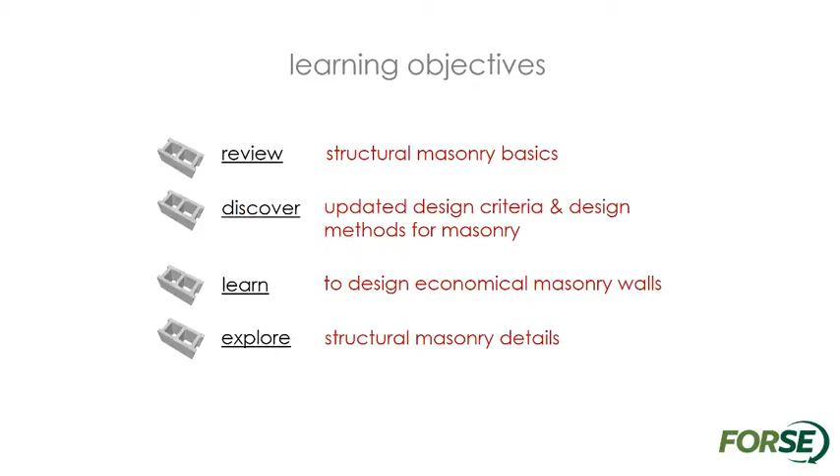So there's a huge misconception in the field of building and construction today that masonry is not a good building material. At least that's what I see on a day-to-day basis. People say it's too expensive, it's too old, there aren't any new techniques to be used, it's not attractive. And I'm here to challenge all of those beliefs because masonry is completely flexible, it's very cutting edge, and we need to give it some more credit than we currently are. So a little bit about me before I get started.

I'm a structural engineer, and I'm licensed in California and in Arkansas, which is where I currently live now. I came up today from Jonesboro. I got my undergrad at Notre Dame, and then I moved out west and got my master's at Stanford. And that's where I started my career. And so for those first 10 years of working, I was a consultant in Southern California.

And then I joined Bentley Software. I don't know if you're familiar with Bentley. They do a lot of engineering software, but they also have MicroStation, which is their big drafting product. And then I joined FORSE in 2016, where I've been ever since.

And FORSE Consulting is a team of engineers. We all come from a variety of backgrounds, and we all have a pretty diverse experience in design. We've all worked extensively with masonry. We're a consultant to the International Masonry Institute and have been since 2010. And like I said, a lot of us have specialized in masonry design in our careers. So the fact that I started my career in California will lend a little perspective to this presentation for you.

When I started designing, we were working on every project under the sun. We had military barracks, we had park structures, restrooms, comfort stations, pavilions, that type of thing. Schools with gymnasiums, hospitals with outlying buildings. And because I was a new engineer and I didn't know any better, I just used what everyone else did there, and that was masonry. So we did a lot of masonry design with steel framing or wood framing.

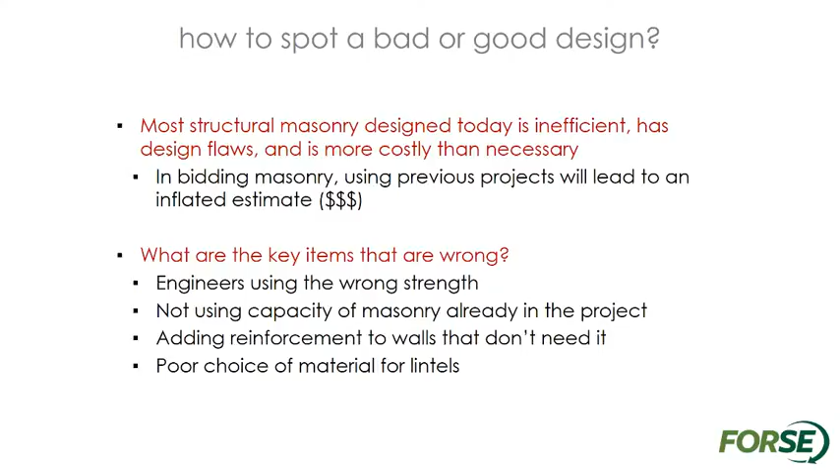And the key items that are wrong are engineers are using the wrong block strength. That is a huge one, and we'll jump into that one pretty quickly. We're not using masonry that's already present in the structure. It may be ignored and then built around. And that masonry is usually there in some form or another with stair towers or shafts. When it is there and it's not used, we're over-reinforcing it. A lot of partition walls don't need reinforcement. We'll talk about that later too. And then investing in your choice of material for lintels can be pretty expensive if you're trying to force a material into masonry that doesn't necessarily need to be there.

So if we move away from the bad design to the good design, we'll move away from lower f'm, which is the block strength, to higher values. I'm not really going to go into control joints too much today, but that also has a huge effect on the cost of your construction. You would move away from putting them in openings and into the field of the masonry. Steel lintels should be replaced with masonry lintels. Instead of reinforcing all of your partition walls, only do those that need it.

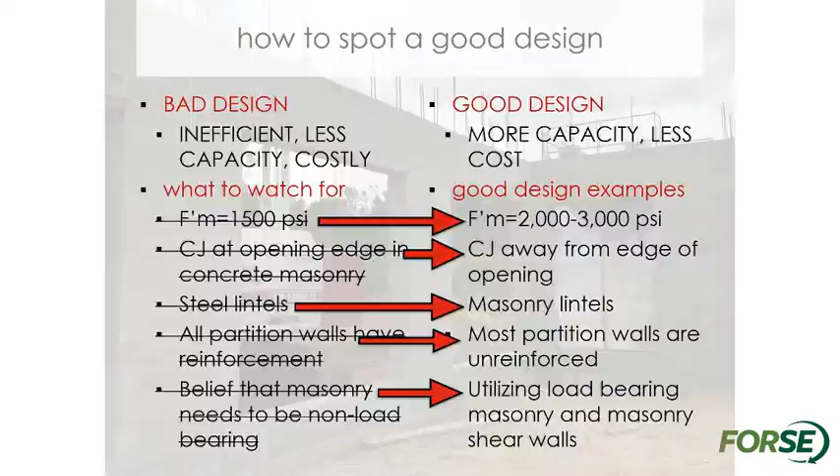And then change our mindset, the belief that masonry needs to be non-load bearing. A lot of people think, oh, the wall is there and I just need to design around it. But if it's there, we need to utilize the strength that it brings to the project. So here's the order in which we'll address our topics today.

Can everyone hear me okay? Okay, I think there's a mic on it here, but I tend to be a little bit softer spoken and then I go quickly and I don't want to lose anyone.

So we'll start off with some structural masonry basics, move into some of the masonry systems that are out there, talk about stair towers and shaft walls, interior partitions, masonry and steel interfaces, and then finish it up with lintels.

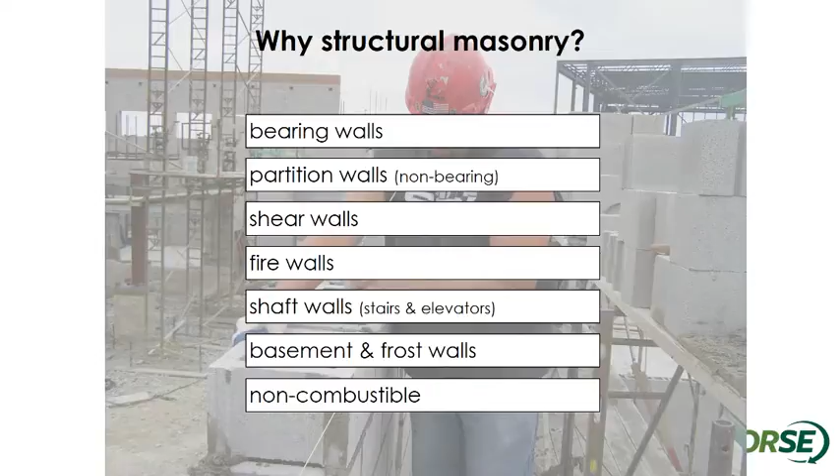All right, so for the basics of structural masonry, why would you use structural masonry? And how can you use structural masonry? You can use it for all of these: bearing walls, partition walls, shear walls, firewalls, shaft walls. Like I mentioned, they are going to already be there, so we need to take advantage of that. Basement and frost walls, I won't go into that a lot today. The material is inherently non-combustible.

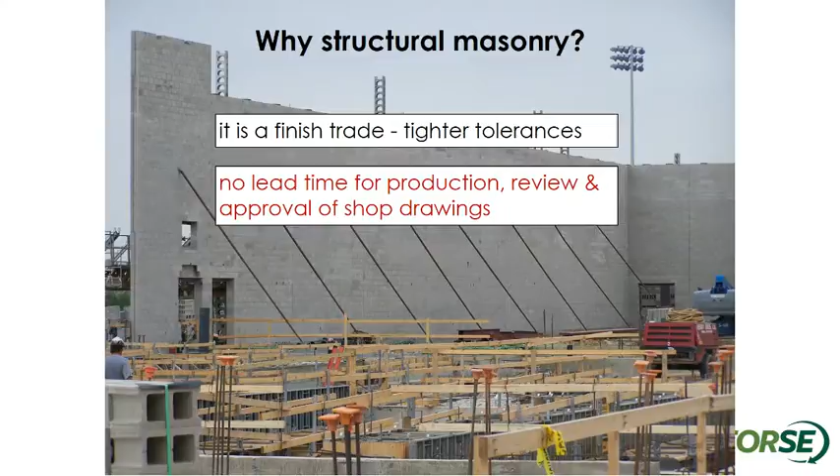It's a finished trade, so you have tighter tolerances when you're constructing in the field. There's no lead time for production. If you're waiting for your steel shop drawings or your review, you're going to set your timeline back a little bit. Since a lot of this can be done on site, you're not tied up with that. Because it's on site, you can adapt easily to field changes.

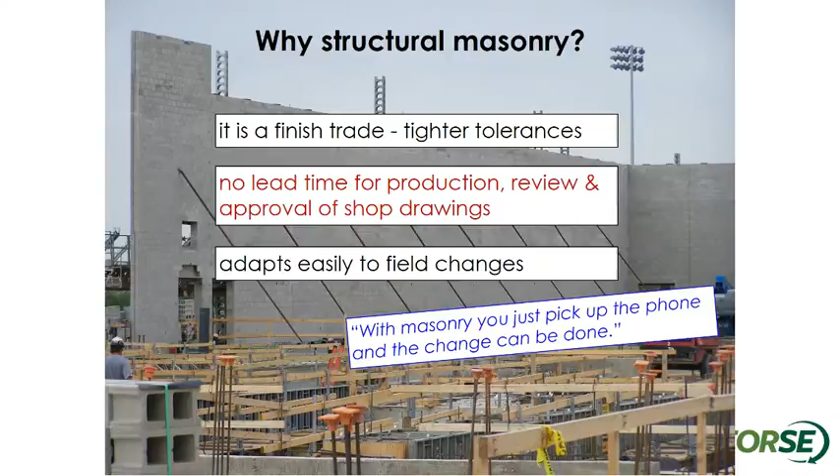And this is just a quote that we like to say: with masonry, you can just pick up the phone and the change can be done. You don't have to go through endless series of RFIs and back and forths and creating new shop drawings and new fabrication drawings. So this one material can be used efficiently for the structure, the exposed finish, fire resistance, blast resistance, storm resistance. We'll talk a little bit about some tornado shelters later on. Moisture resistance, acoustics, and the list goes on and on.

So for you as architects, you may sometimes be told by the engineer, this is what we're using for masonry, and that engineer has some of these mindsets of, I'm only going to pick a value from a table, or I'm going to use something that I always did. And what I'm hoping to educate you on today is some of the areas where you can push back on that and say, you know what, we might be able to use a higher strength block, or we might be able to not reinforce some of our partition walls and save some cost on your structure.

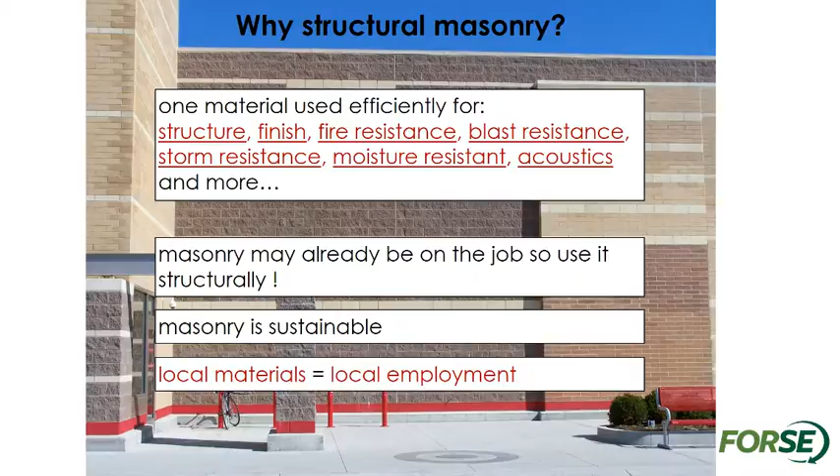So it's not necessarily efficient or something that we would do today, but it goes a long way to show you that we've been doing load-bearing masonry design for a long time. It's still standing over 100 years later. And it's just an example of the mindset that masonry can be used. At the time that was designed, there weren't even any empirical tables available.

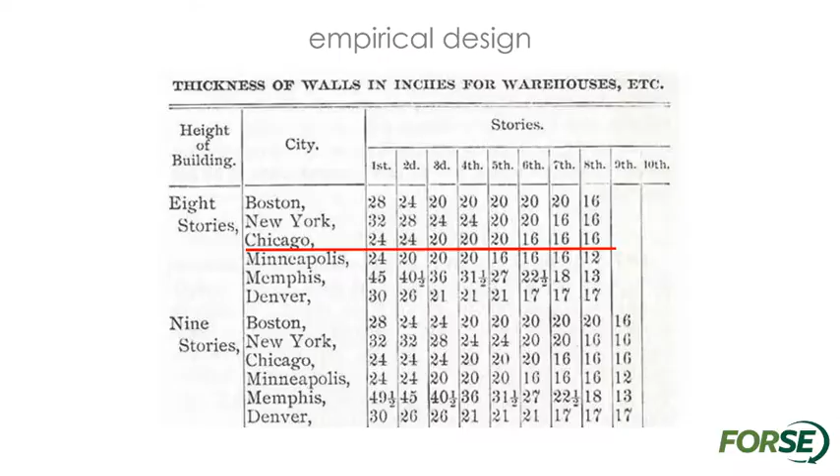So a little bit of the history of masonry. Masonry and concrete have sort of a staggered timeline. The first reinforced concrete codes were introduced in the 20s and 40s. And it was only at that time that research on masonry structural behavior was beginning. So the ACI code came out for concrete, and then in the 60s, the first engineered masonry code came out. And that is when those tables would have been available as empirical values.

In the 60s, ACI was already moving forward from allowable stress design to LRFD design, and masonry has taken a little bit to catch up. But the gains that they've made in understanding in the last decades have been implemented. We have software.

I mentioned that I worked for Bentley. RAM Elements is one of the programs that first introduced finite element analysis capabilities into their software. With that, the idea of designing masonry has really taken off, because we're no longer thinking of it in old-fashioned terms of just the block and strips or spans of block. We can now look at it as a cohesive element. We can look at the way the wall flexes with the wind, and take advantage of some of the inherent stiffness in that wall that empirical values don't really allow for.

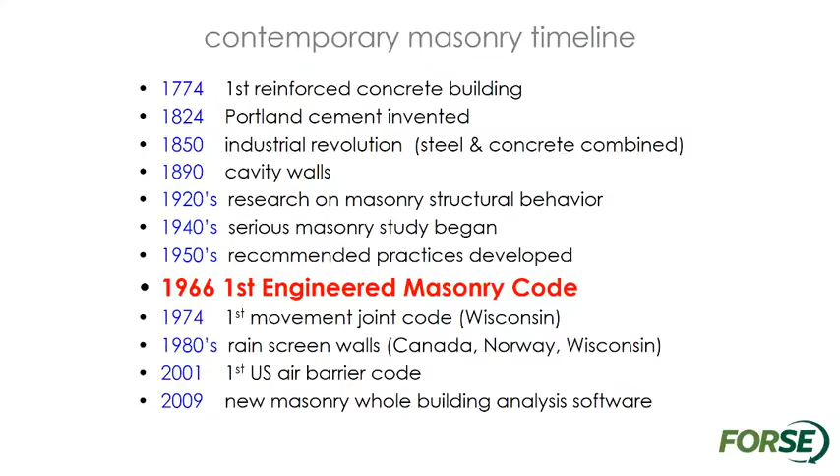How often are bond beams used - those vertical spaces? What about bond beams used as a lintel or for out-of-plane loading on the wall, as horizontal reinforcement in the wall? That's going to depend more on the seismic requirements.

This was in Wisconsin, I think, which wasn't high seismic. So I don't have the exact numbers for the horizontal reinforcement, but it was probably just welded wire reinforcement - no bond beams, except at the top of the wall.

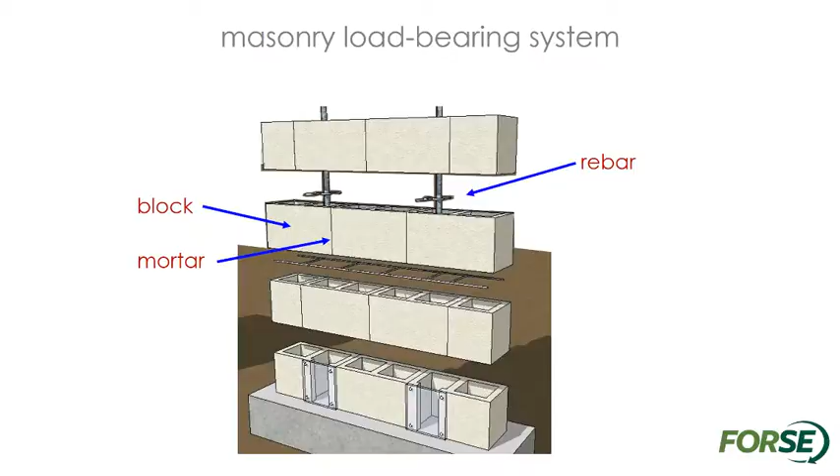Horizontal joint reinforcement, as I was just saying, usually isn't very structural - it's more for crack control. But if you get into a high seismic or high lateral area with a lot of shear in that wall, then you'd start putting in horizontal reinforcement. In most of the design I did, we didn't use bond beams for that - we just used rebar spaced similar to how the vertical rebar was, so number 4s or number 5s at 48 inches or 32 inches or whatever was required.

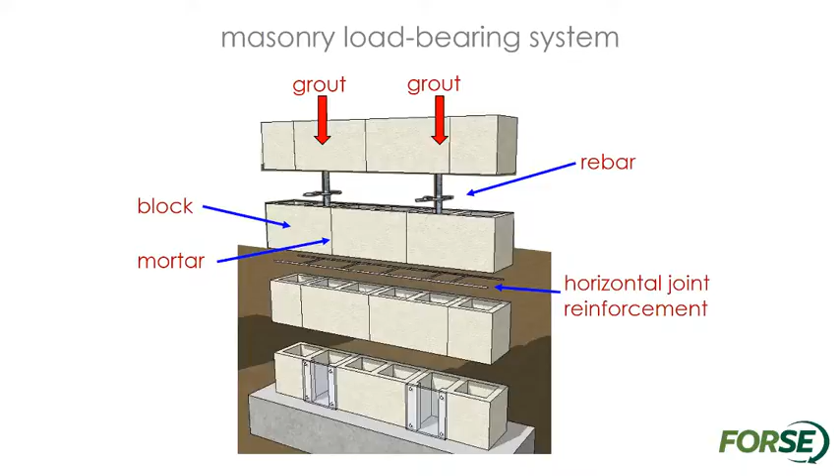And then, of course, the grout, which is placed where the rebar is located to turn this into a system. The rebar takes the tension and the block takes the compression in the wall.

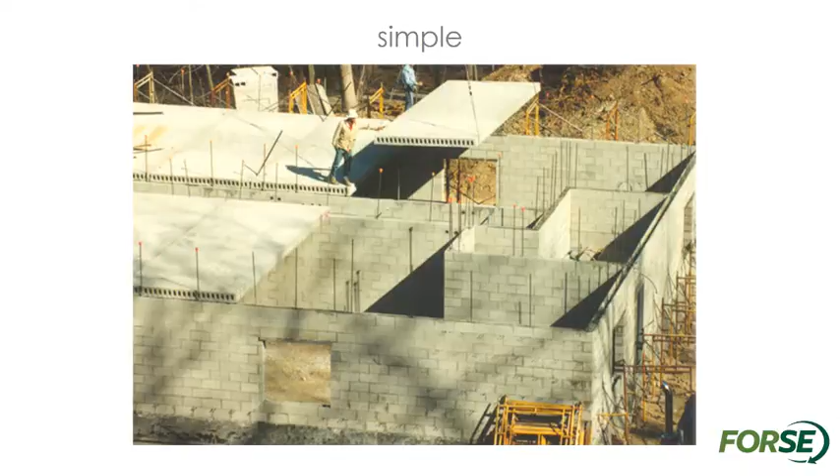So masonry has a lot of advantages. The fact that it's simple and it can be built on site, or it can be complex. You can go up many stories with many openings, like we see here.

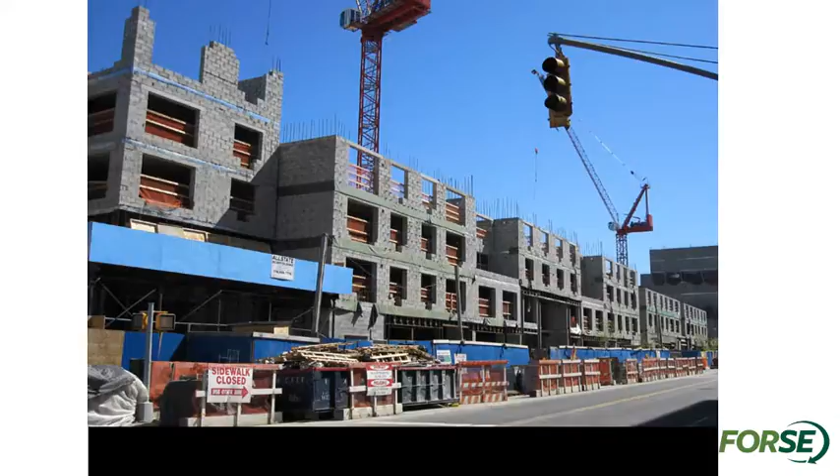The more lightly loaded the wall, sometimes the more reinforcement that's required. And then you end up with a less redundant system. You're relying heavily on those small steel angles.

Okay, so moving into block strength, this is something that I want you to take home today. For sustainable masonry design, use what's available to you. Use what's, quote, off the shelf, what's local, and use the strength that is being provided.

Historically, engineers, when they're being overly conservative, say we're just going to use the minimum block strength available, which is 1,500 psi. So when you talk about F prime M, you're looking at two different components. You're looking at the block itself, and then you're looking at the mortar type that connects that block together. It's the combination of those two that give you the strength of the wall.

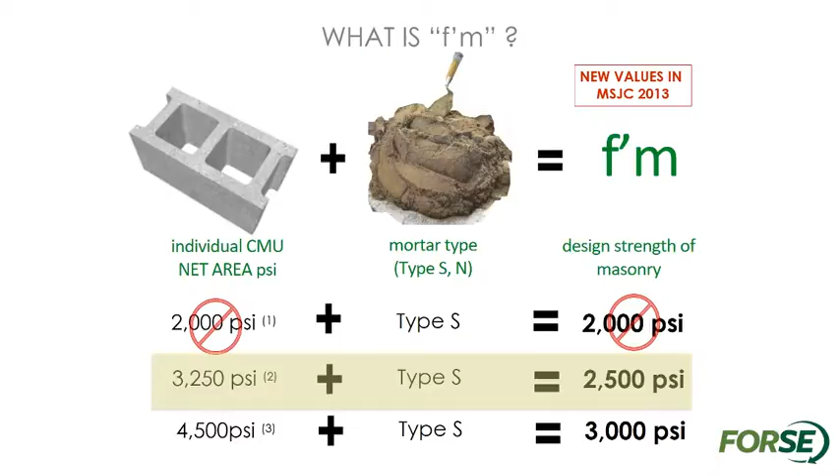But then getting these even higher values has become even easier with higher block strength. That's just because of a lot of the quality that's been provided and the better testing methods that are available.

So F prime M is important because when you're looking at the design of the wall, it comes into play with everything. It's going to factor into the bearing calculations, the shear calculations, the lintel calculations. When you add it all up, you're going to get a much more efficient design.

And that 2,000, even though it's the minimum, in reality we're seeing much higher values. You may even be able to double your concrete strength, still using the exact same block that you were using and specifying at 1,500 F prime M.

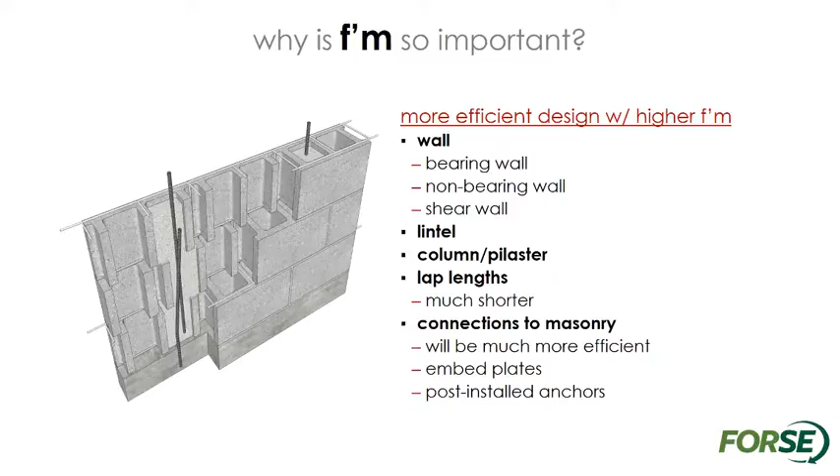And here's a little cost impact analysis that we did a few years ago. This was a 4-story tall wall, and it was 12-foot floor to floor, and the original strength was 1,500 PSI, and 12-inch block was required for this.

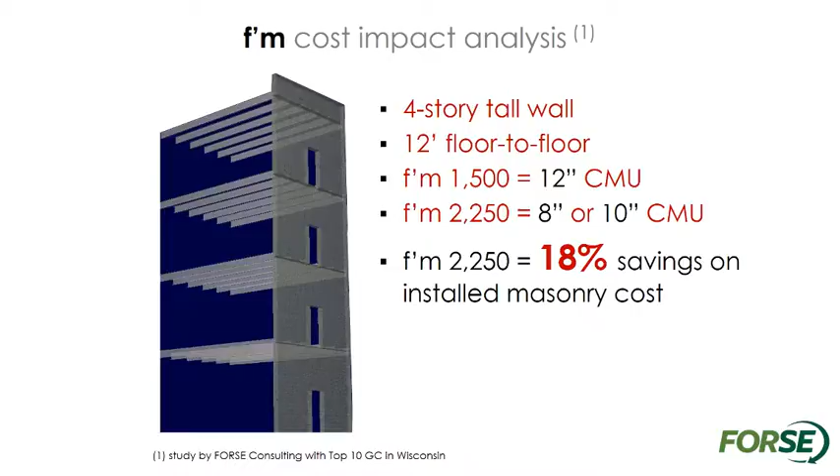We did a little study, and just by increasing the block strength by 50%, which is 2,250, just barely above the minimum available, we were able to reduce that to an 8-inch CMU wall, and that translated to 18% savings on the installed masonry cost. For this $2 million masonry contract, it was $360,000 of savings. And that was not specifying anything different than what was already on site. It was just taking advantage of the strength of the block that it already has and not defaulting to that minimum 1,500 PSI value.

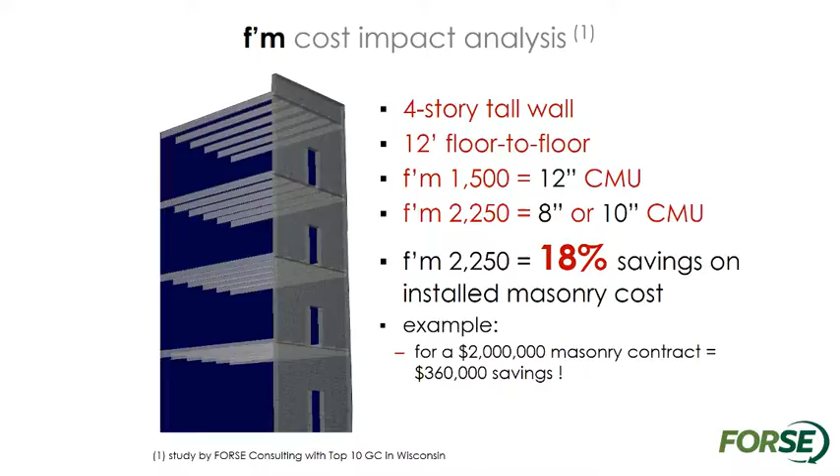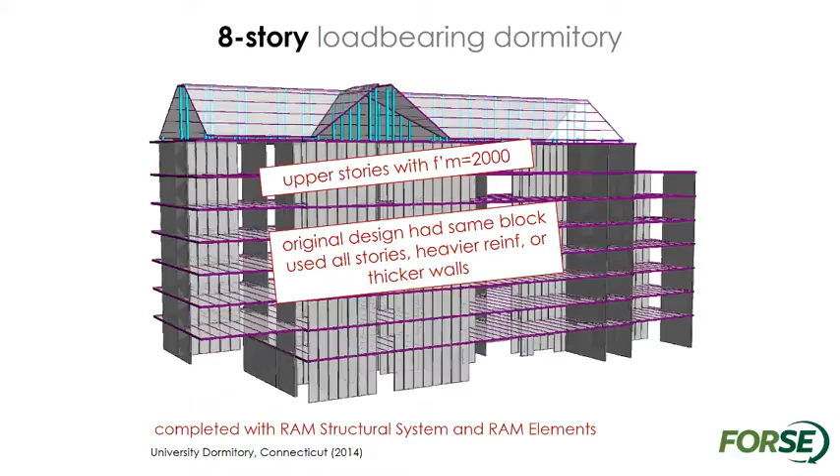This is another example we did for an 8-story load-bearing dorm. In the initial design, the upper stories used 2,000 PSI with an 8-inch wall. If they continued the 2,000 PSI at the base stories, they had to go to a 12-inch wall. So we ran it with higher strength values, 3,000 PSI, and were able to continue the 8-inch block thickness all the way down, lightening the reinforcing. With that 8-inch wall all the way down, you're helping out architecturally too, not losing as much floor space at the lower levels. This was another example showing savings just based on using higher block strength.

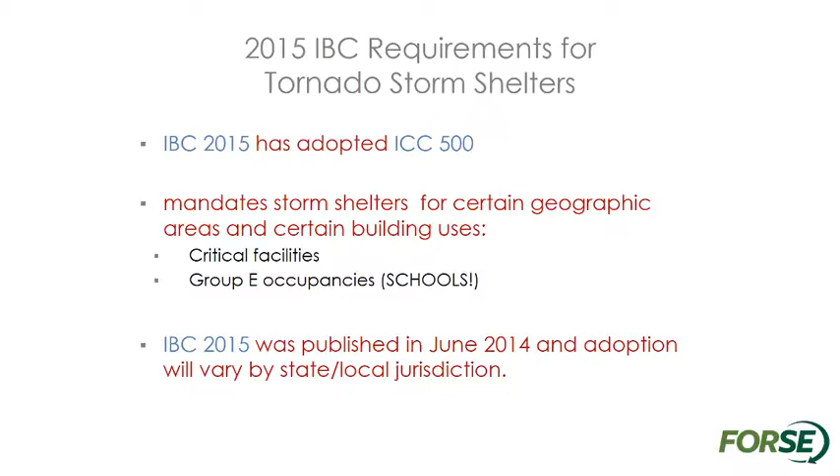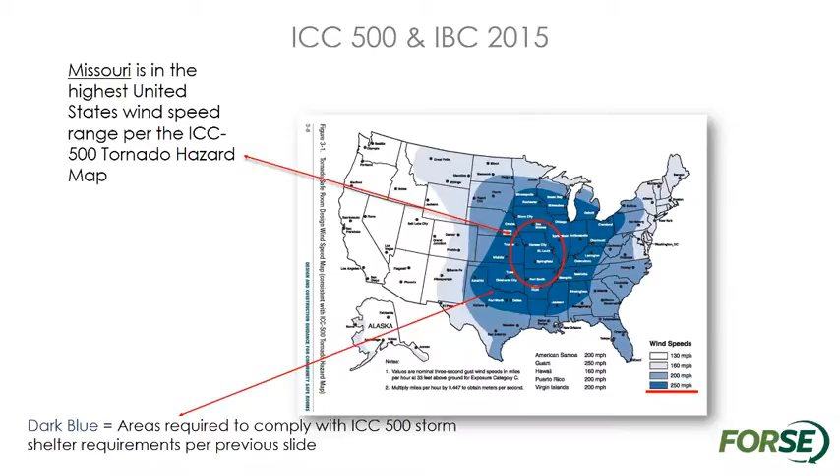When this is adopted, these requirements will be mandated. So if you're working on a school or a critical facility, these storm shelter requirements will be necessary, and they are pretty stout. This is a graphic of the wind loads this is targeting, and you can see Missouri is in the darkest blue area. That's the 250 mile per hour region, and your structure has to be able to resist those requirements if it's in one of those categories. Masonry does a great job resisting wind both in plane and out of plane, and it's a nice choice when you have to add these requirements on top of all your regular building requirements.

That was really all I was going to jump into on the codes.

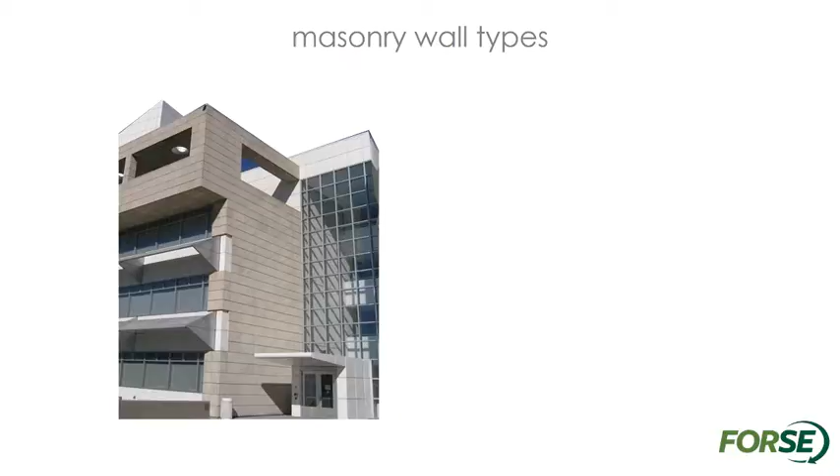Masonry systems, there are many available. When I think of masonry, I think of a single wythe wall—that's just what I used and designed and practiced the majority of the time. But of course you can do a cavity wall system, and you can attach masonry veneers. They can be anchored or they can be adhered. That's just in the masonry family.

If you find that you do need steel, there will be times when you need structural steel in a building. Hybrid masonry structures are now becoming much more prevalent. You may have a concrete or steel frame and then infill that with masonry, and that's available in a lot of design programs now as well.

Prefabricated masonry is coming along. In the past three years since I've been with FORSE, we've seen prefabricated lintels used a lot, and we've even seen some prefab stair towers used. The construction timeline benefits from that, because you can fab everything and then bring it to the site and place it, which speeds up your timeline quite a bit.

This is maybe not intuitive to people. When they think of masonry, they think of it as old-fashioned and not having a lot of options, but there are actually quite a few ways to use masonry by itself, or with veneers, or with steel, to make your structure efficient. There's a lot of flexibility.

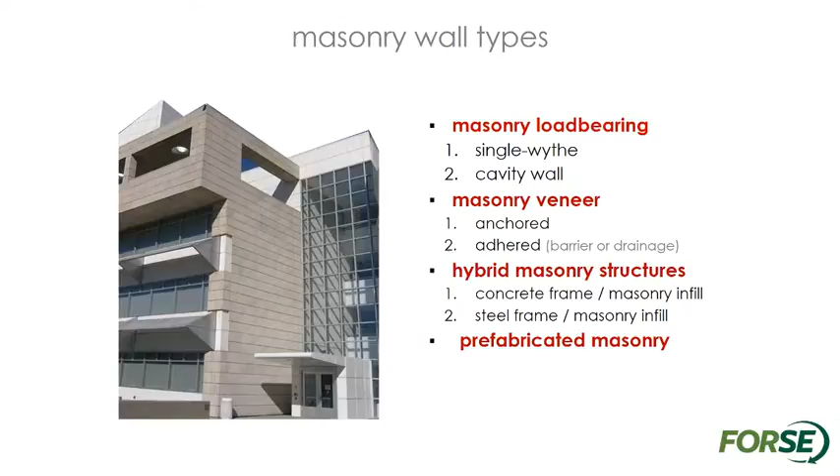Even if you have a completely different building system, don't forget about masonry. It can be used in almost every system in many different areas. This is just a little checkbox of where engineers do use masonry.

Stem walls is actually something I wish I had a little more time to talk on, but stem walls and basement walls are defaulted to concrete. A lot of times people assume they either can't get the thickness of block they need, or they think they have to solid grout the foundation wall, but that's not true. You can use these foundation walls in all building systems for a savings.

And then of course your shear walls, your shaft walls, bearing walls, partition walls—and those bearing walls can be interior or exterior.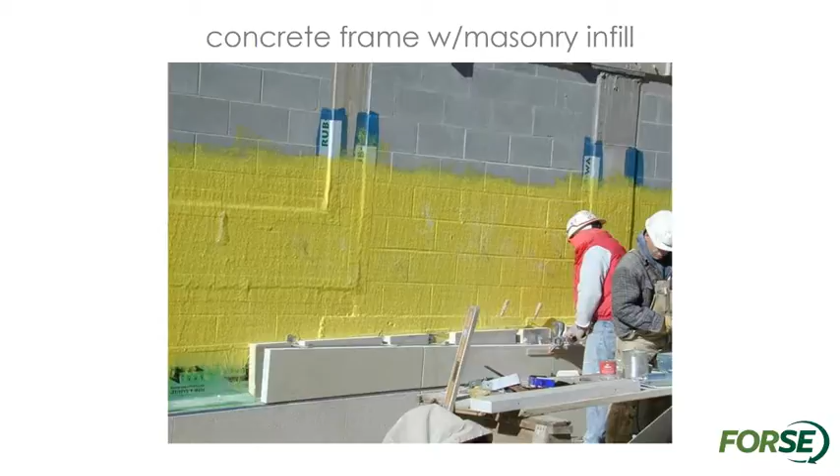Prefab masonry panels. In this project, the contractor and design team determined that prefab bearing wall partitions would be most cost effective. So all of those walls denoted with a red arrow there were prefabbed and then placed on site.

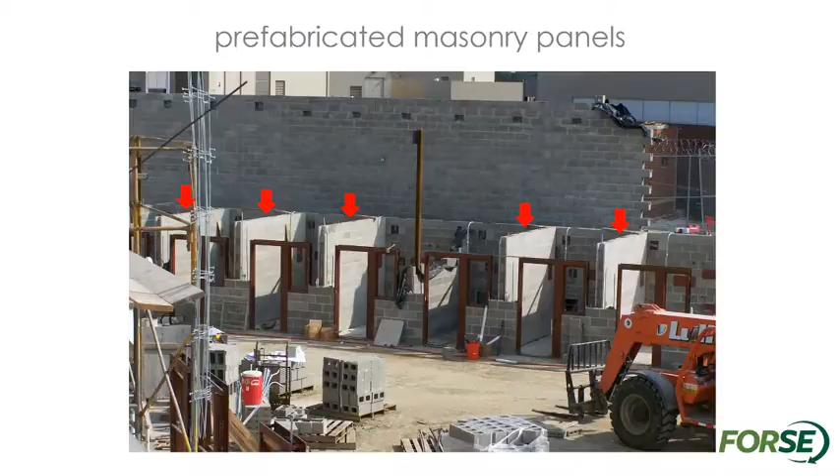And this is a picture of what I was talking about with the prefab shaft walls. Those were, I think, built on site, but built on the ground and then lifted into place.

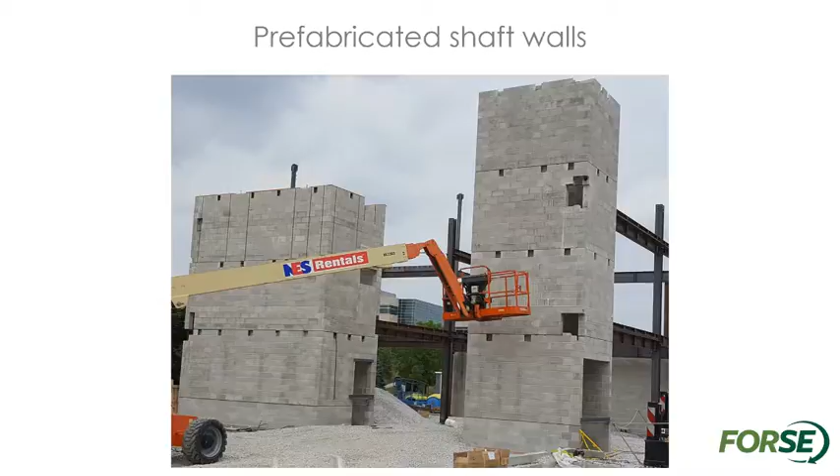Prefab lintels, I have a whole section about lintels later, but that's another area where sometimes it's easier to construct it on the ground or off-site and truck it in.

Okay, so those were the systems that were available. Now we're going to talk about stair towers and shaft walls. Just because of the nature of multi-story buildings, you're going to have some needed towers in most of your structures, and sometimes they're not used to their full potential. So here's my only question of the presentation today: which of these walls requires more reinforcement, the more lightly loaded wall or the more heavily loaded wall?

Masonry likes load. When you compress the masonry, it's stronger. It can resist forces out of plane better and in tension. So if you take away the load, you actually end up with heavier reinforcing in some instances. So if the wall and the tower is already there and it performs better and is cheaper to reinforce with more load, then we should definitely be taking advantage of that.

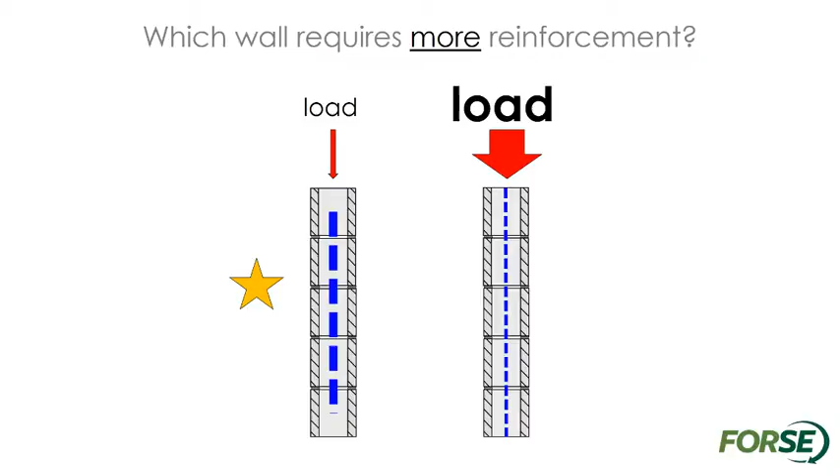It's not going to say, okay, I'm a wall, but I'm not going to take any load because the engineer said that I wasn't going to. It's going to attract that load. And those steel frames will take some of the load, but a much smaller portion than they would if there were no walls there. So realistically, the building is going to impart load on those walls. We can design without considering them, but then you're adding unnecessary steel when the walls themselves can often take the full load.

So don't frame around them, just use them. The same is true for wood construction. This is a multi-story wood residence where you've got that nice stiff tower right in the middle, but plywood shear wall panels are being used for lateral. So there are some considerations in wood design. Often you can't get all of the load back to that wall, but some of it could be taken there, and we should take advantage of that as well.

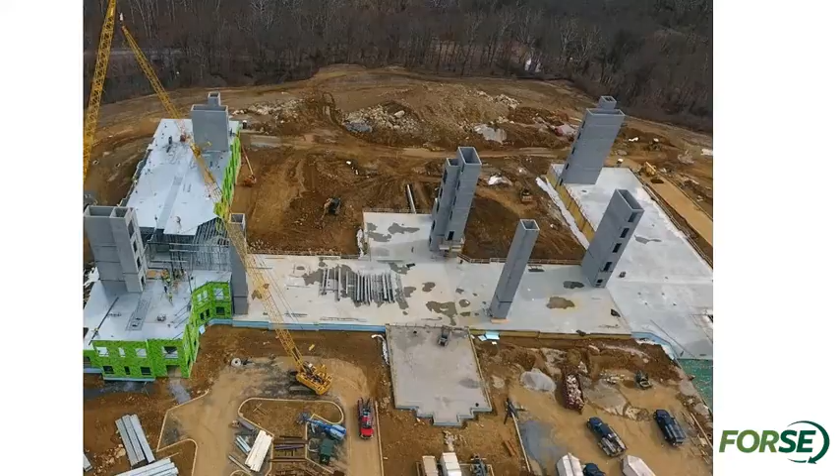Okay, so interior partitions. This is an area where I think 99% of projects could save money on. People default to the idea that it's an interior partition, so it has to be reinforced. And oftentimes the tables and standards that have been used are outdated, or maybe just a rule of thumb that someone designed.

So we've got here an interior partition wall that has a bond beam at the top and interior pilasters. According to the code, if it really is truly a partition wall, then it does not have a structural function—that's the definition by the code. So it's not going to be heavily loaded, and we can take out all of these items and the reinforcing to be more cost effective. The top of wall bond beam we took out is not really needed in a partition wall. It's necessary in a shear wall, but a partition wall is not intended to take shear, and it will be detailed because the code requires it cannot take loads if it's a partition wall. So the attachment points at the top will prevent that from taking load. Just by removing some of these typical elements, you're already lightening the cost of the wall.

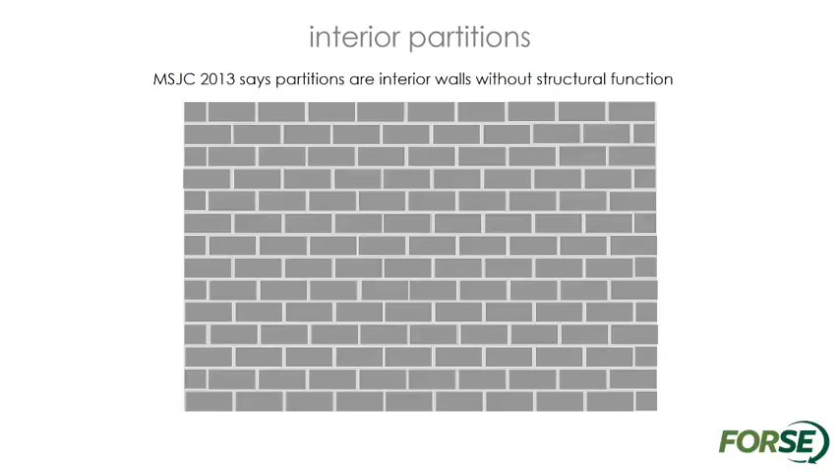And then if we take a look at the actual code tables for partition reinforcement, this is the other eye-opening chart that people take away from this. For a seismic design category of A or B—I think I heard someone say it's C here, St. Louis is C—but this table here is just for A and B. So even a 6-inch wall can be completely unreinforced if it's a partition wall up to 14 feet tall. An 8-inch wall, you can go up to 18 feet with no reinforcement necessary. There's nothing in the code that says you have to have some reinforcement in your partition walls. As a matter of fact, the code says you really don't even need it for a 16-inch block at all, up to 30 feet tall.

Would that include wire mesh?

Since wire mesh is more for crack control, no, I think this would apply mainly to structural design.

Do these have to be braced at the top? Yes. This is considering a wall that's spanning from floor to floor. If it was a cantilever wall, it would be very different.

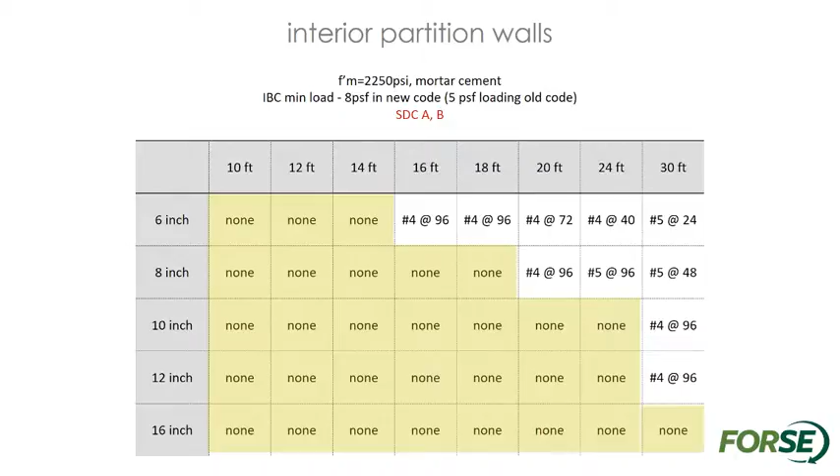If you move up to seismic design category D, an 8-inch wall is reinforced, but it's still a lot less than what I see typically. I see number 4s at 48, sometimes number 4s at 96, but number 4s at 10 feet is the minimum requirement in seismic design category D for up to 18 feet. An 8-inch block can go up to 18 feet tall.

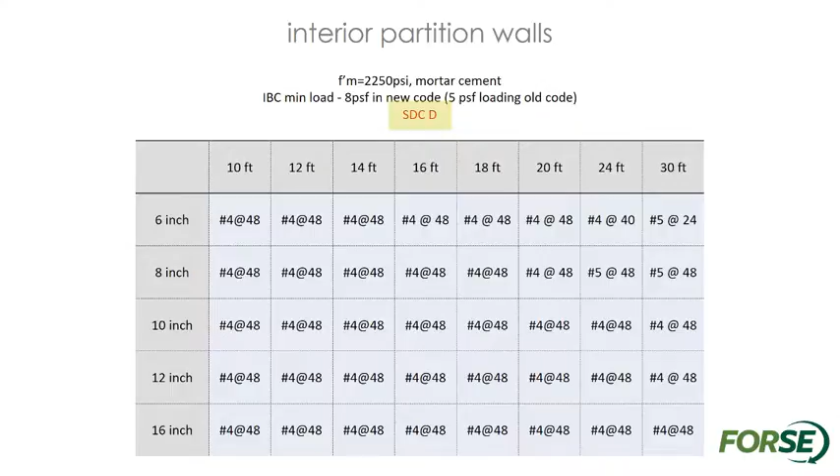And in seismic design category D, that's where you really start seeing the heavier concentration of reinforcement in the wall, and it requires number 4s at 48 minimum everywhere. So if you have a typical detail saying reinforce all partition walls with number 4s or 5s at 48 inches on center, that's a significant savings cost just by eliminating that.

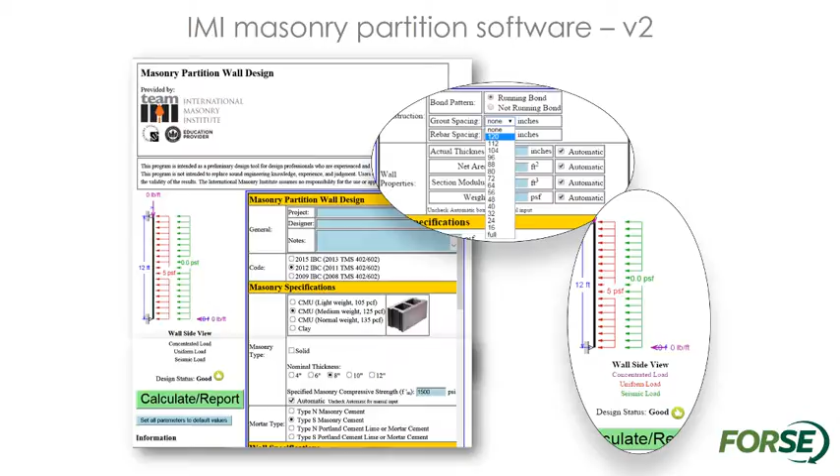If you're not comfortable looking at the tables, IMI, the International Masonry Institute, actually has a free program on its website. You can plug in some values and get preliminary design requirements for your partition walls. This could be done very quickly in a design meeting or pointed out to your engineer who may not know this is available, and it gives you a rough idea of whether those partition walls will require any reinforcement.

So masonry and steel, when put together in a building, can work properly, but it has to be pretty well detailed. If you start putting in steel lintels where a masonry lintel may suffice, you're going to start adding in quite a bit of coordination and extra work that wouldn't be required with a masonry lintel.

And there's some things you have to be very careful about. If you have a steel beam, you're going to have to match the finish and put in this infill panel around the beam, and that becomes a very weak point.

So you've got this very thin face shell. Sometimes this is at a roll-up garage door, and you might actually see quite a bit of potential damage in that area if things are running into it. So where the structure might actually need to be a little bit stronger, it's weaker, just cosmetically.

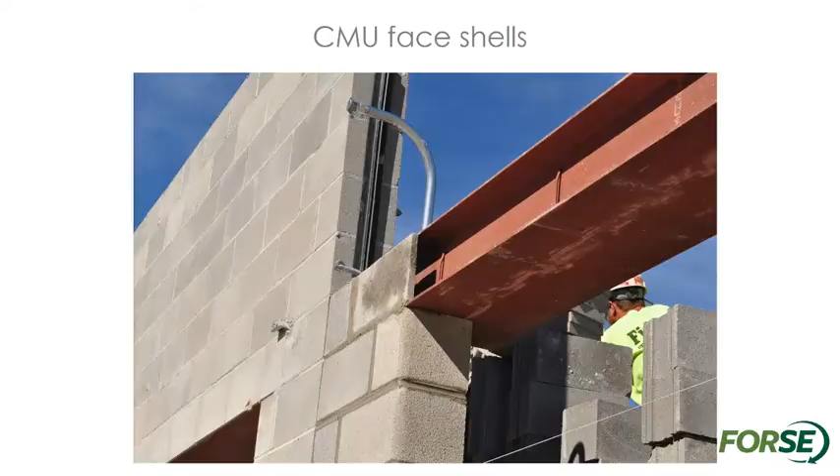If you try to fit a steel column into a masonry wall, you may end up with an issue where you actually can't put face shells around it to hide it. In this particular example, that's what happened, so in the final product they ended up furring out the wall, which was a huge cost addition.

If they had just relied on the masonry for the column, for the support of a lintel or a masonry column, they could have eliminated that. If you do manage to get a column inside a block, the face shells are going to be susceptible to cracking at that location.

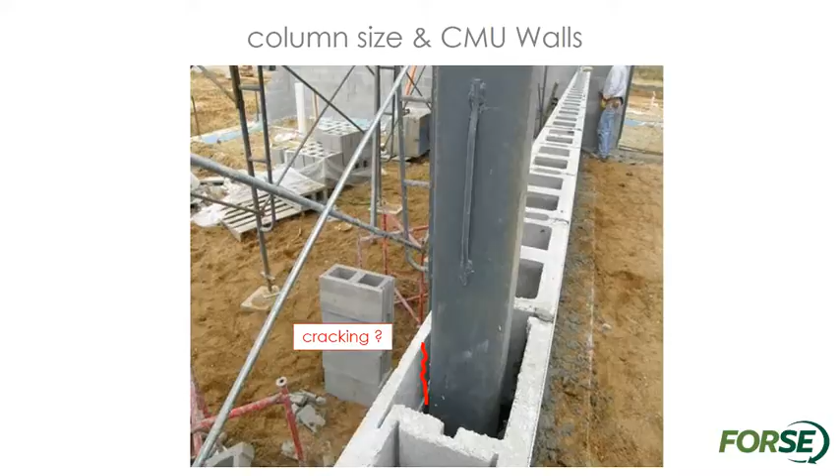This is another case study where the initial project had steel lintels everywhere, and we were asked to come in and... no, I'm getting confused on which one this is.

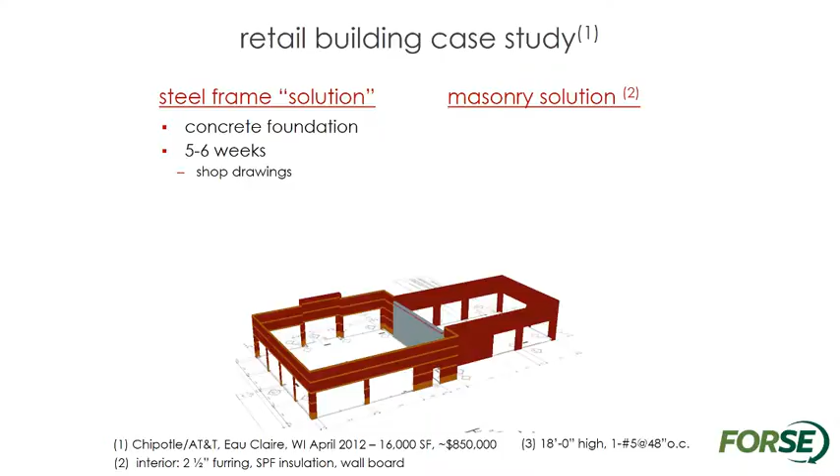There were steel columns and a concrete foundation. The steel shop drawings were not going to be ready for 5 to 6 weeks. So the request was: if we use masonry, would it speed up our schedule? In this case, it was more of a schedule concern than a cost concern. There were 54 columns, and it was a pretty complicated layout. So when we switched to a masonry solution...

We changed to a CMU foundation wall, using 8-inch CMU load bearing wherever we could, as opposed to steel, and included a 4-inch veneer on that. It reduced the number of steel columns to 9 — only 9 locations out of the 54 required steel. The schedule was less than 4 weeks for all of the masonry, as opposed to waiting 5 to 6 weeks for the shop drawings to even get started on the steel construction.

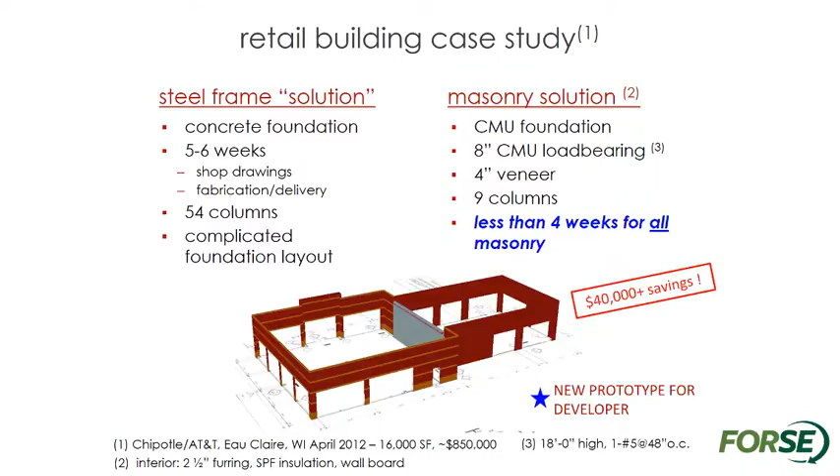That ended up in an estimated $40,000 of savings on this project, and the developer liked this concept so much that they switched to it as the prototype for future sites.

Okay, so the last topic that I'm going to cover is lintels. We've already talked a little bit about that in the masonry steel interface area, but when you have a masonry building, let's say you've been fortunate enough to get it spec'd out and you know that you're using masonry, it's going to be a good design, there's still this tendency to feel like we have to put a steel lintel in instead of masonry. There are 3 types of lintel options that you could use.

Masonry itself, which is the best solution, I think so, architecturally and structurally. You can use steel, which is very common but generally not needed, and it makes that simple construction not simple anymore. And then precast. So if you have a steel lintel, you're going to just run into a lot of coordination issues. It has that longer lead time than masonry. You have to conceal it, so you have to think in advance.

My width of my steel beam can only be less than 7 5/8 inches or 11 5/8 inches or whatever that dimension of your block wall is going to be. It's best if you can match your depth of your steel beam to masonry course depth. So you got to think about that in advance too, or else when you start to cover it up, it's just not going to look right. And then steel is very dissimilar from masonry in the way that it expands and contracts. So you start to have connection requirements that are needed. It just goes on and on and on.

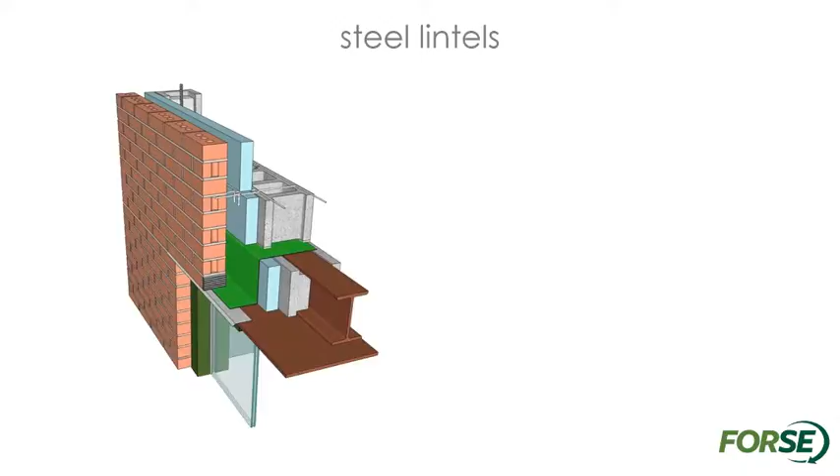So I think I just went through all that without clicking. Yeah.

One big rebuttal that we often get is, well, you need to shore up the masonry lintel while you're building it anyway, so we might as well put the steel there. And there's easier ways to do it, less expensive ways to do the shoring than to just rely on the steel lintel because of shoring.

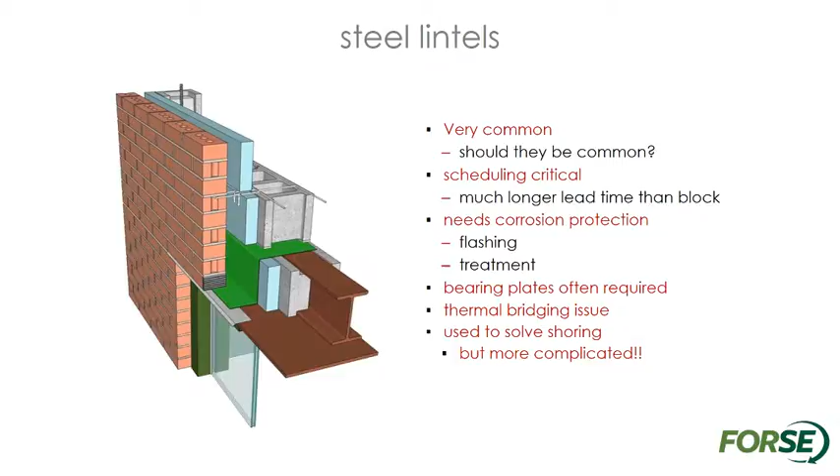Yep. I actually was going to skip this slide, but we calced out that this could have been a much smaller plate than it was, and it ended up being a huge task to get that steel lintel in there. I'm just going to skip over that one.

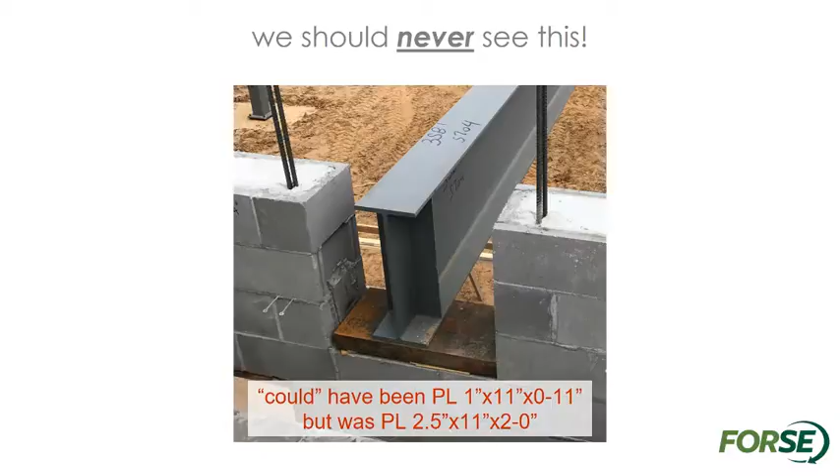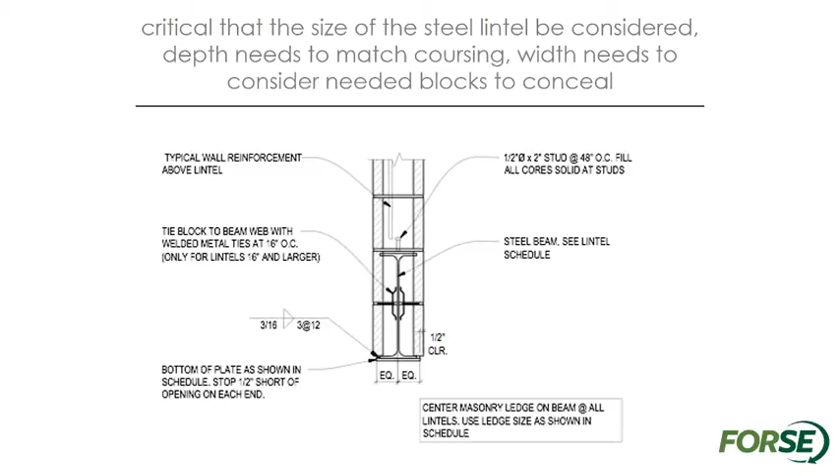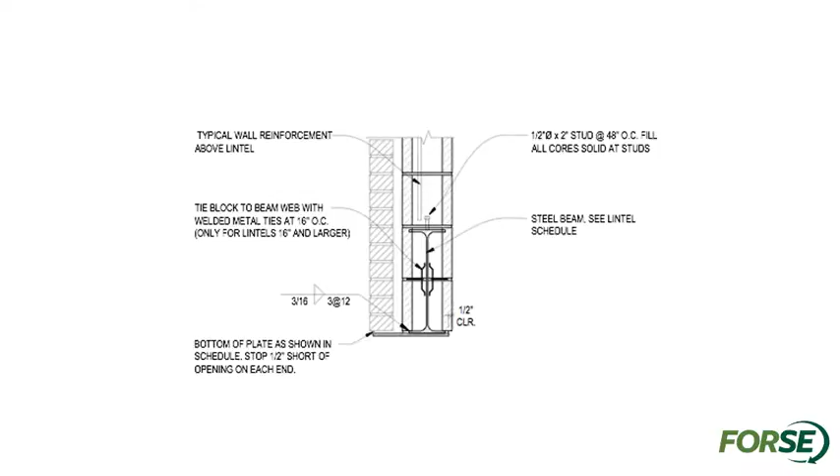So if you do detail for steel, then you have to start taking a look at all of the issues. I already talked about that. A lot of times if you have a veneer, then you're going to be adding a shelf to carry that veneer and tying it back to the steel lintel. And if you do that, you're creating torsion in your steel beam. Sometimes that's overlooked. People don't even realize that they're going to need to design for torsion for that. But if it isn't, then your beam is going to end up being much larger than you were expecting, or maybe I've even seen people use tube sections for beams.

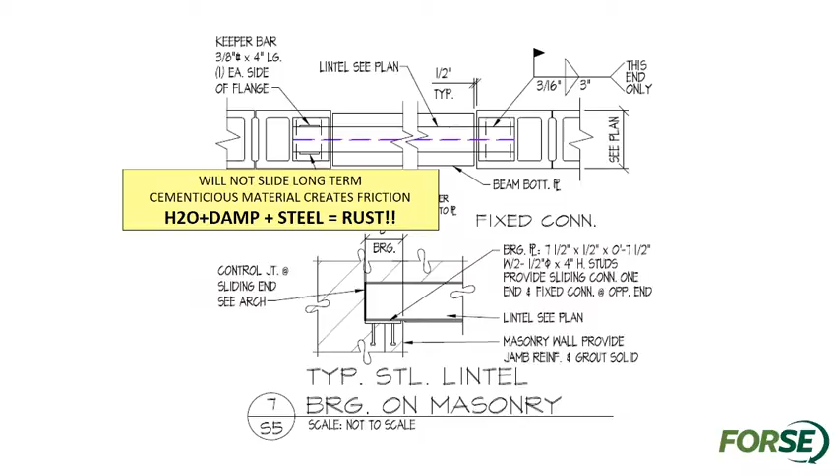And then trying to anchor it in, you need to have the ability for the steel to expand and contract differently than the masonry. And a lot of times that's detailed out initially, but over time, water comes into play. You may get rust. It may rust to the plate, and you're not going to have that expansion capability anymore. Where the bearing plate is anchored, we see a lot of cracks happening there.

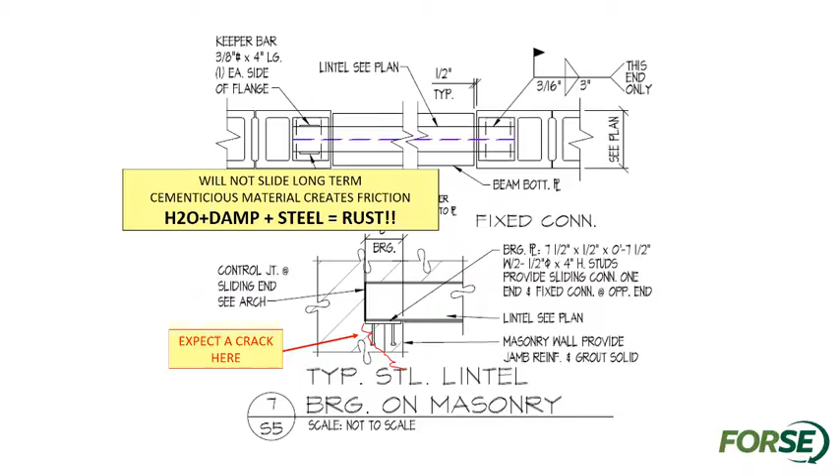The bearing plate also interrupts the jamb steel at the opening. It should realistically go full height there, and that's something that you have to take into consideration. Maybe move your jamb steel out and run the risk of that not being done properly. And then oversizing bearing plates is just, again, it's one of those things where people think bigger is better, but that's not necessarily the case. Oh, and we talked about the torsion.

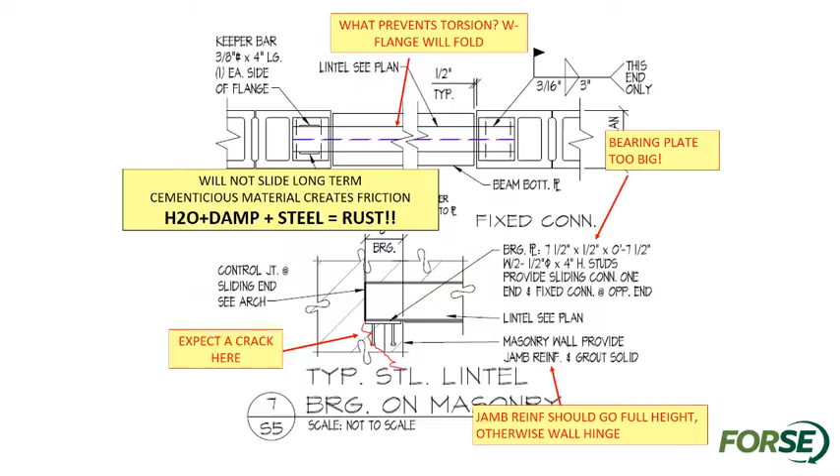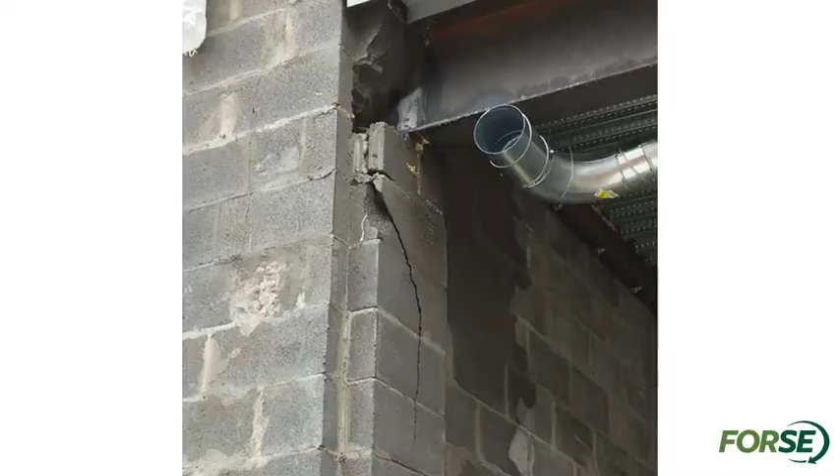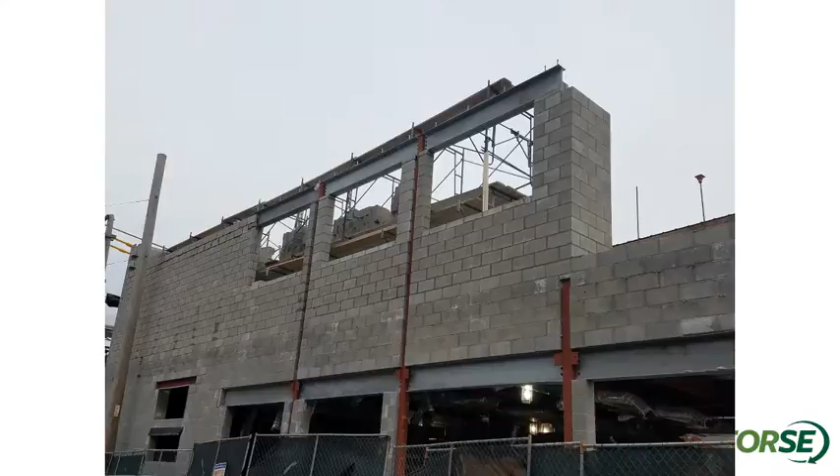In this case, it would have been much, much easier to just continue those 2 courses of masonry and use that as your lintel. Masonry can easily span 6 to 10 feet with just a course or 2. And if you had depth above it, you could get even longer spans.

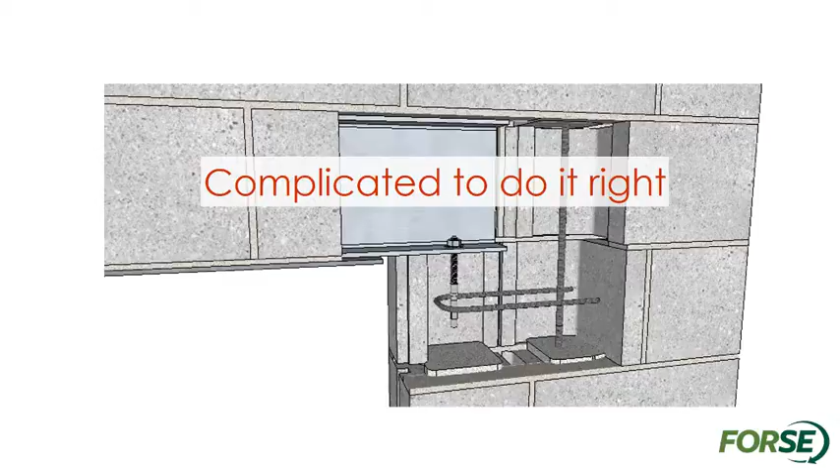Where that bearing plate is tying in, it's creating that crack at the wall. In order to prevent that, it's often detailed with U-hooks in the masonry wall itself to hook around the anchor rods in the bearing plate. And it's just a lot of steel, and it's complicated to do it right, and it's even hard to fit that steel in the wall.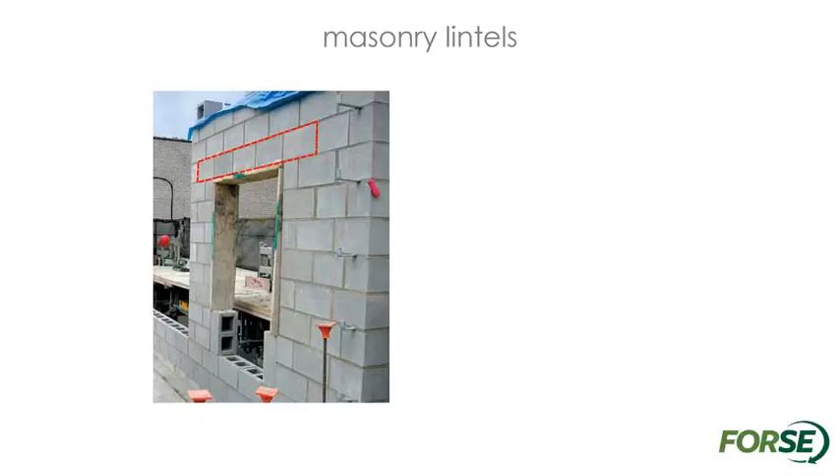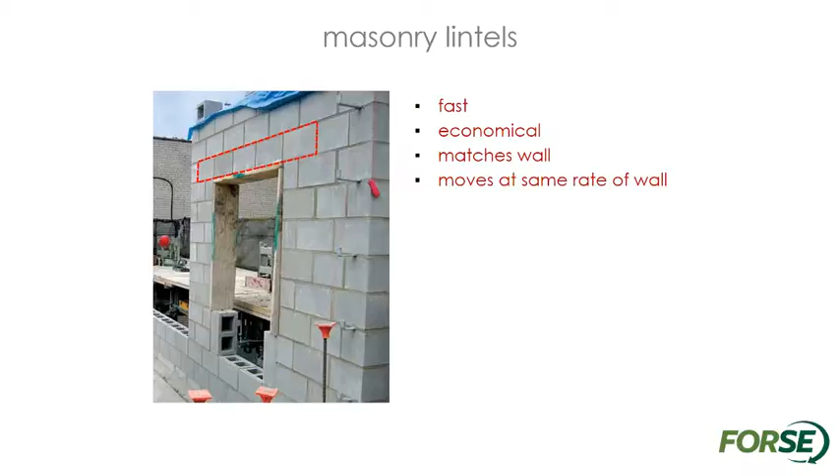So masonry is the easier and cheaper solution in most cases. It blends in, it's fast, it's gonna match. We can construct it at the same rate as the wall because we're not waiting for the steel to come in. You can build it in place, or you can get it prefabbed. It has significant span capabilities.

And in a recent project we did, we had 12-foot lintels. This is not so typical. But they were willing to say, we're going to reinforce 12 courses of masonry, so that's what we did.

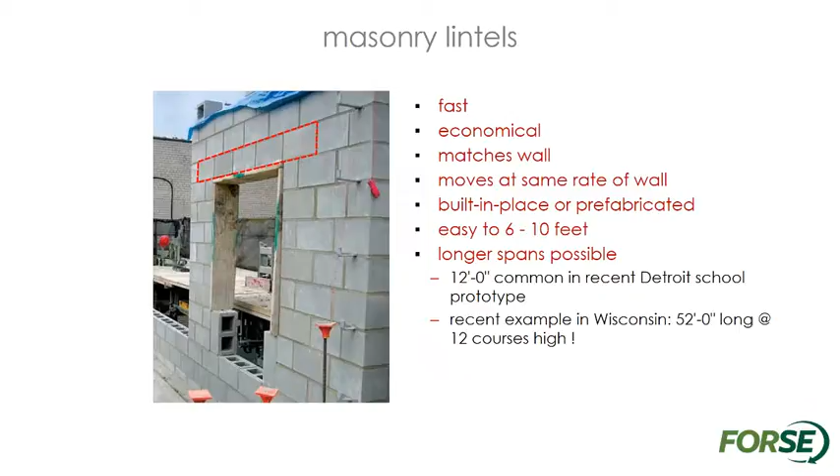I touched briefly on the thermal break. If you have that masonry lintel in there, it's going to be more thermal friendly than a steel lintel. Lintels are integral with the support, so you're not looking at all of that congestion and cutting of your jamb steel there. Another crack.

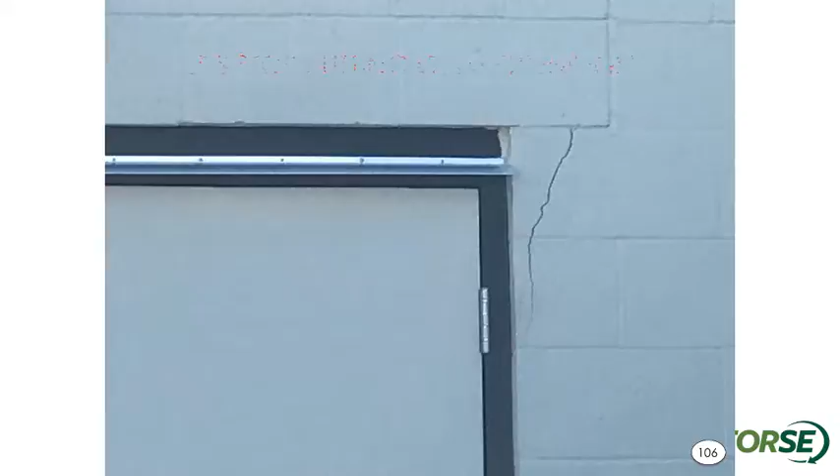We are seeing, I think you mentioned it earlier, we're seeing control joints pulled away from those jambs, 16 inches. Yeah. And you don't need to go over 8 inches and up, just pull it away from the opening. Right, and I think I said in the very beginning, control joints is a whole other topic that I wasn't going to get into today, but when control joints are put at the edge of the opening, you are going to run into more cracking issues, so you need to move them away from the opening itself.

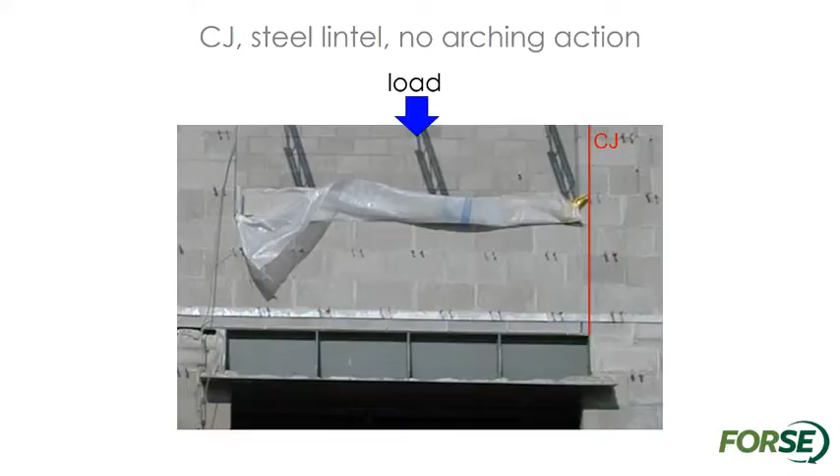If you move it to be lined up with the edge, like that red line there, then when you have the lintel above loaded, the full weight of that is just bearing completely down on your steel lintel. So there's a rectangle of weight up there. But if you move that control joint off to the side, the masonry can act as a whole, and that load can be distributed with arching action, and some of that load actually ends up going around the opening. So your supported load is actually just a much smaller triangle.

So not only have you reduced the cost of the construction and the lintel itself, but you've had to design it for a much smaller load because you're using some of the inherent benefits of masonry.

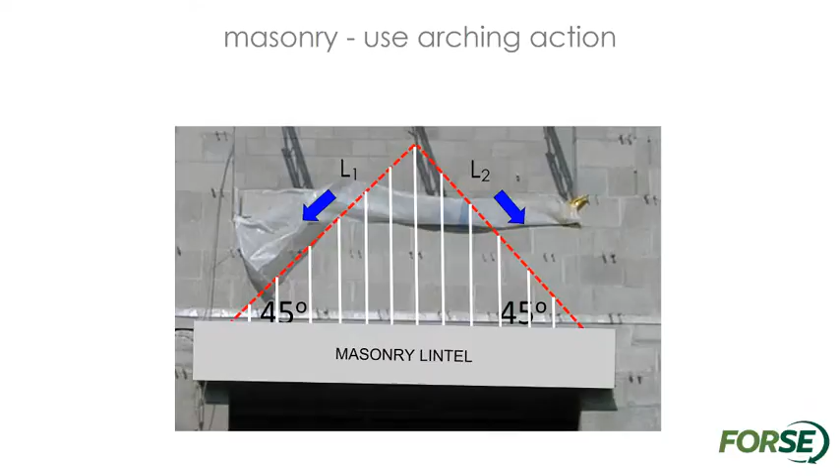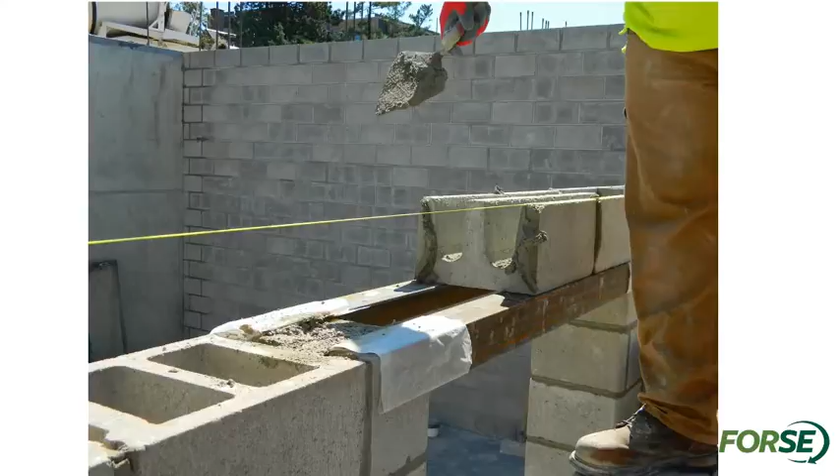Some of the ways around the shoring issue are we've seen people use downturned angles and build the lintel on that with some sort of paper in there so that they can just slide the angle out later. That's just one example, but people get pretty creative with their shoring when they're building masonry lintels. It can be done.

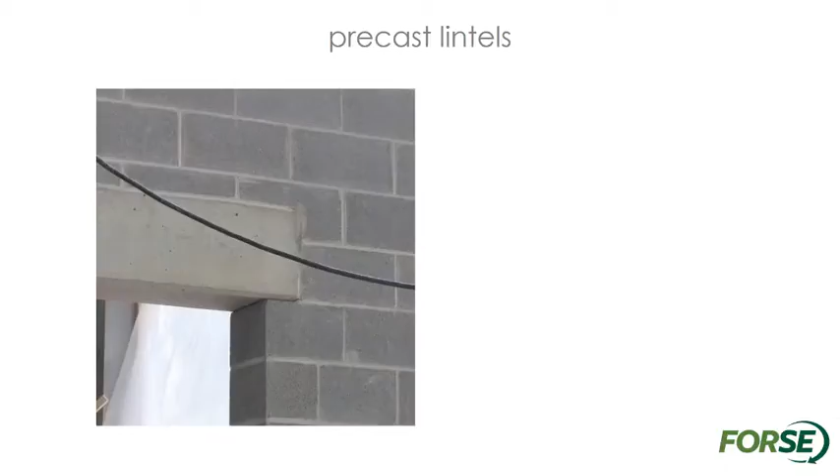And then, of course, precast lintels. This is just a cord draped there. That's not a crack. Every time I show this slide, I get someone asking, what is that? Precast lintels are another easier option. You eliminate that shoring requirement in the field, and you can have those pre-created and ready to go. But, of course, you do need some additional things like a crane to lift them up. They need to be modular with the masonry. And they do need to be properly anchored so they don't roll off.

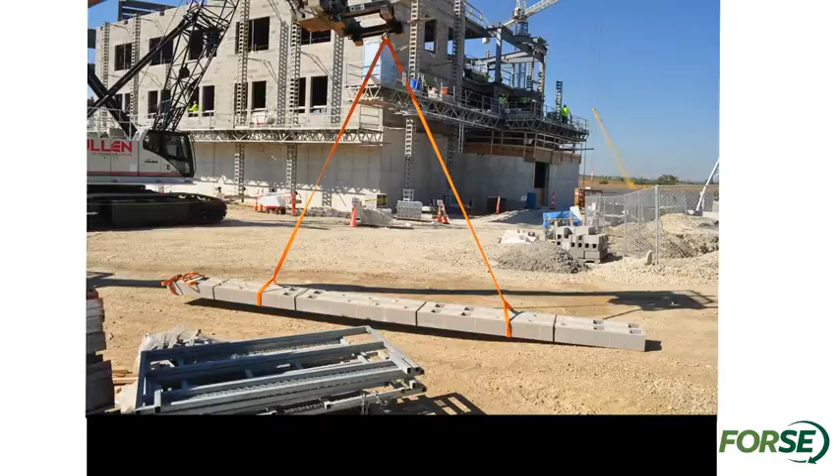This is just one of the suppliers of precast, but it can also be built on site. That's two of the lintels being picked up. This is a multi-course lintel, not 12 courses, but still, that was made on site and then set in place.

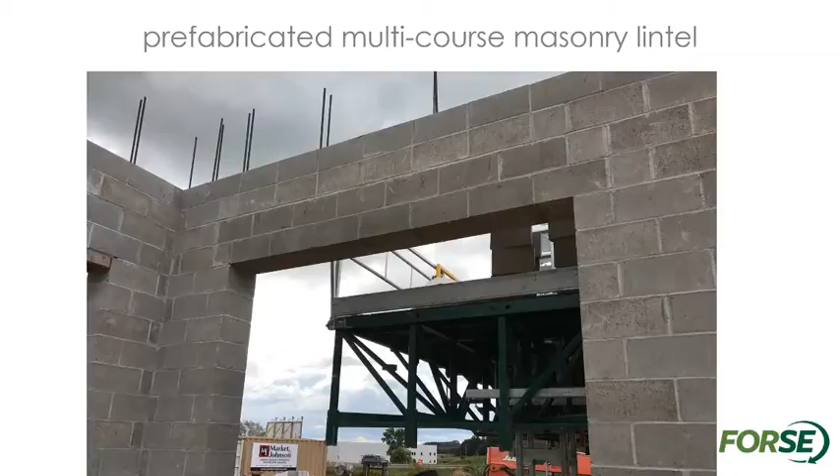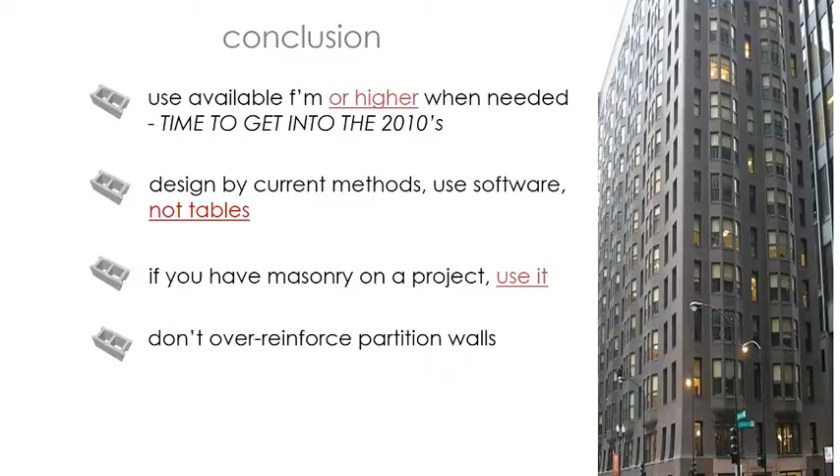And then consider masonry strength for lintels and columns. Don't just throw steel at something because you are afraid to do the engineering, not you, but the engineer is afraid to do the engineering to see if the masonry works. There's programs out there, there's support out there. There's lots of ways to get the strength out of the masonry that it has available.